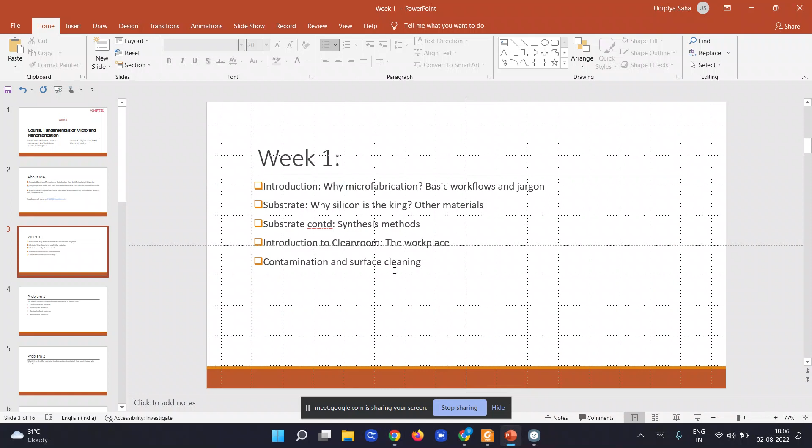Sure. Just wait. Now it's okay. The audio seems okay now. I shared my screen actually. Sorry. I hope you are able to see my screen. Yeah, now the screen is visible. No, sir. It's not visible. It is not visible? Now visible, now visible. Okay, sure.

So I was discussing what I am doing, and what I read from this slide. Week one is why microfabrication, and we discussed the basic workflows and the jargon. So I wanted to ask what is your motivation to take this course? How are you personally benefiting from this course, and how do you relate to it? Where will you be applying it? What would be the final goal you expect from this course? Can you all type it in the chat?

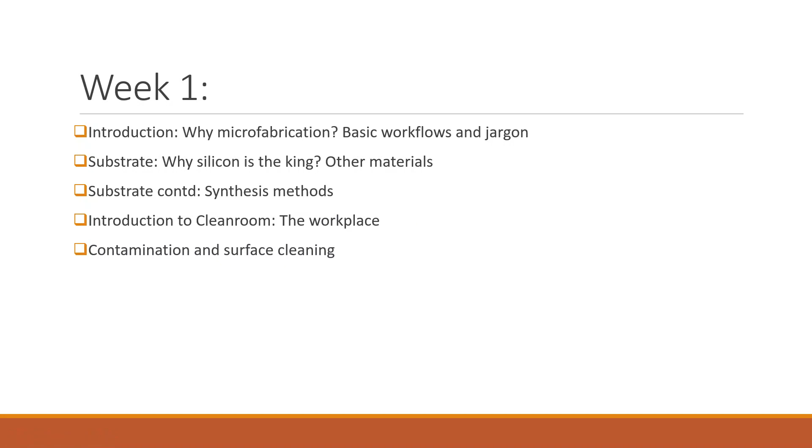The fourth video was on the workplace, the clean room, its intricacies, and the precautions we have to maintain. And the final video was on maintaining the workplace, and all the processing that goes behind surface cleaning. So, moving ahead, I would start with something simple, since I hope the crowd is interdisciplinary in nature. We know that we are working with semiconductors.

So problem one deals with the fundamentals of semiconductors, and it asks: the highest occupied energy level in a band diagram is referred to as? Can you all participate and tell what could be the answer to it? Anybody in the chat? You can raise your hand, or anything you are comfortable with. Okay, valence band. Which one? Minimum or maximum?

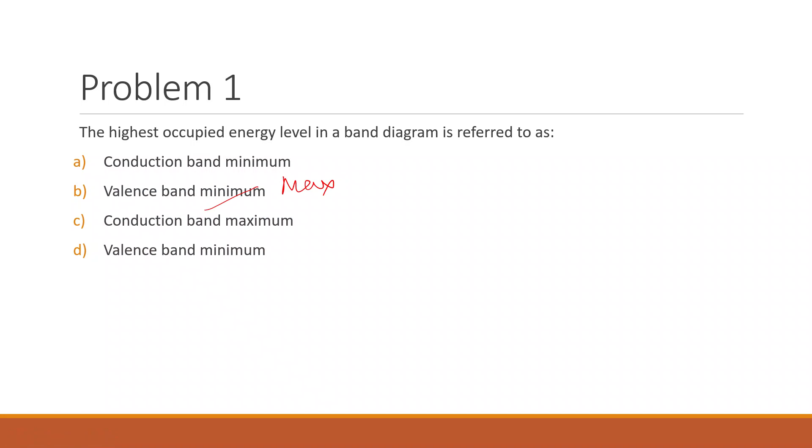So the second question is also pertaining to semiconductors only. We have heard a lot about Fermi level for conductors, insulators, and semiconductors. So the first question is, what is the Fermi level? What do you think?

In the lectures it might not have been mentioned properly, but a lot of times it has been mentioned, what about Fermi level? Anybody knows what the Fermi level is? Anybody can unmute and tell us, you're free to do so. Anybody?

Okay, the highest energy level that an electron can occupy. Perfect, to some extent, but you need to specify something - the highest energy level that an electron can attain at something - specifically, at absolute zero.

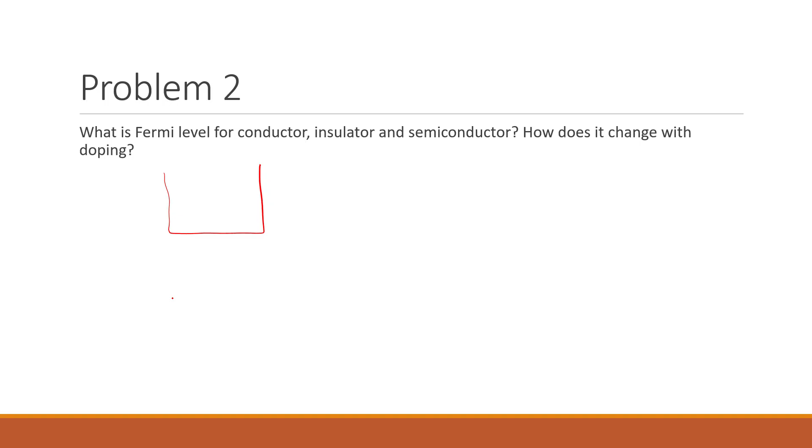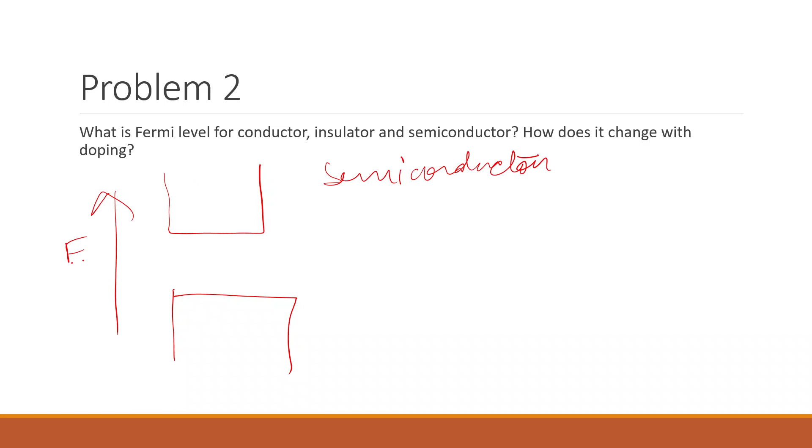So if I have, I hope you can see the structures - let's take conductor, insulator, and semiconductor. Let's talk about semiconductors first. If I consider this as energy, this would be the conduction band, and this is the valence band. The Fermi level for intrinsic semiconductors is usually in the middle of the two bands. This is what is called the Fermi level.

Similarly, for insulators and conductors, similar things happen. But with semiconductors, this is interesting because in the lectures we also delved upon doping - how does the Fermi level change with doping in semiconductors? We have two types of doping: N-type and P-type. With N-type, we basically have more charge carriers.

So what do you think - from the intrinsic part, this is the intrinsic, meaning no doping - should the Fermi level increase, meaning more than the intrinsic Fermi level, or should it be less than the intrinsic Fermi level? What's your take?

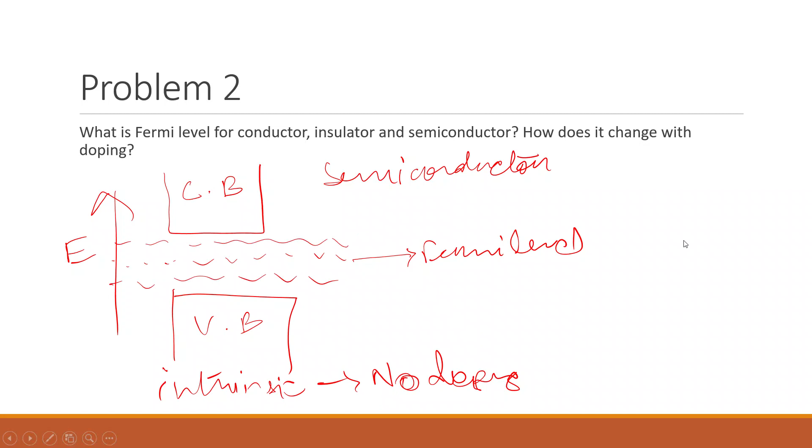Towards a perfect answer, perfect - so it would be like this, near the conduction band. And for P-type it would be reverse, it would be near the valence band. Perfect answer. So let's go to the next thing.

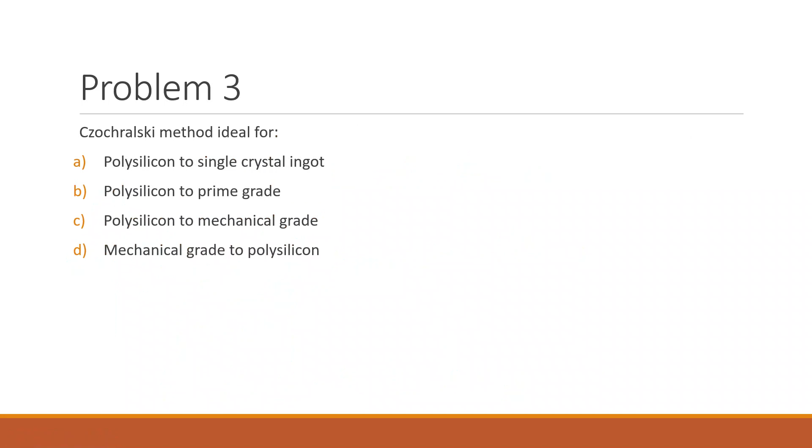So we have read about the Czochralski method, so it's a small question. Czochralski method, to summarize, has a seed which is lowered in a liquid and pulled out, and as it is pulled out, a single crystal is formed on the receding crystal, first on the seed and then on the following things that immobilize on that seed. This is the Czochralski method, and it is one of the most primarily used methods for silicon crystal formation.

So the thing is, first, what is the method used for? It's a straightforward question - Czochralski method is ideal for what? The first option is polysilicon to single crystal ingot. Polysilicon has a lot of crystals of silicon, converting to single crystal ingot. Polysilicon to prime grade - prime grade is what we use mostly for electronic applications. Polysilicon to mechanical grade is used for mechanical applications, and the fourth option is mechanical grade to polysilicon. Somebody has answered it as polysilicon to single crystal ingot - any more answers?

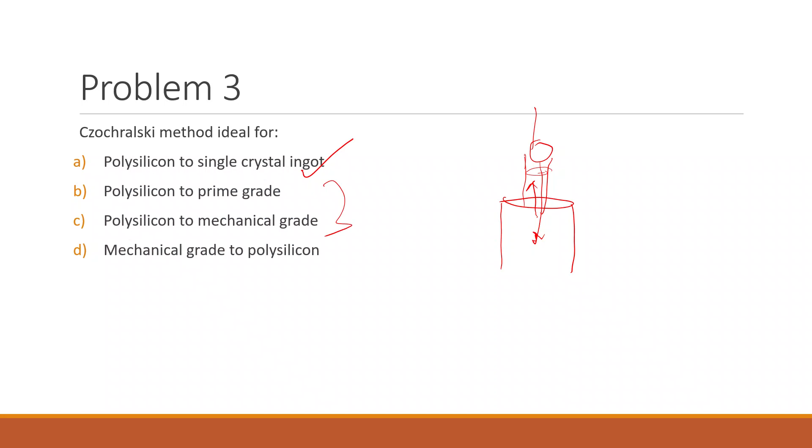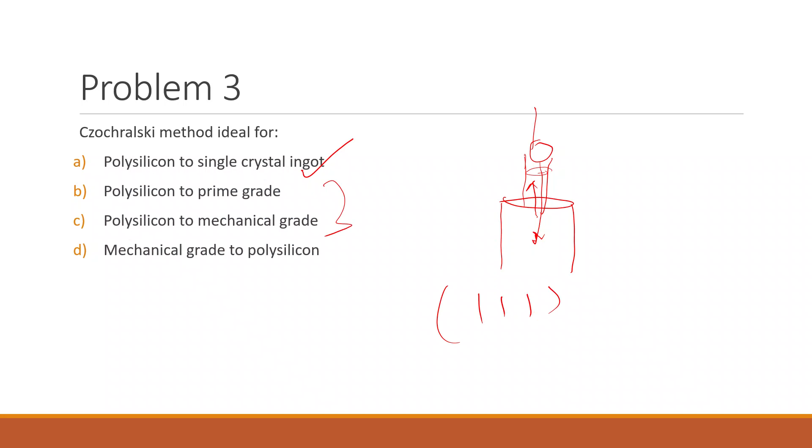Nice, you can get prime grade. So essentially it is a single crystal, meaning it will have the same plane, like a 1 1 1 plane throughout, but the quality can differ. It's essentially a single crystal, which is what is formed with the Czochralski method.

Following up, for this method, growth on which plane is more difficult? That is the question. And there's something that also derives its economy, like how cost effective that method is, and which is easier to build.

So what do you think - 100, 111, or 110? So which one is more primarily used, that I think would be most.

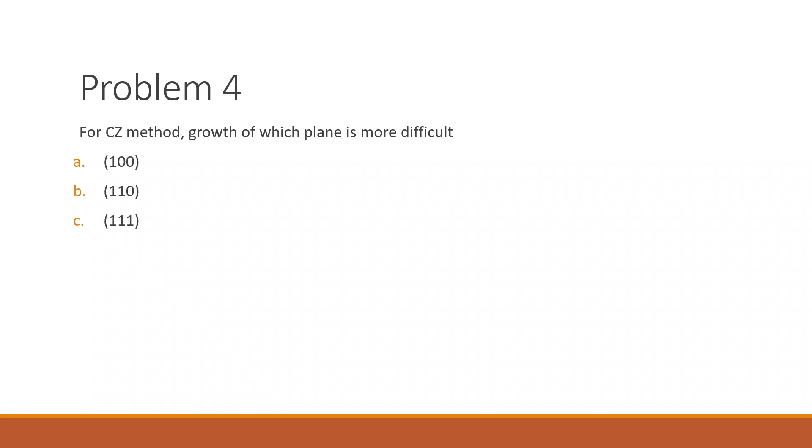Others can also participate. Nice. Okay, so everyone is saying 110.

So the easiest growth is done along the 111 direction, that we know. The examples, the primarily we will get a 111 plane, like silicon, and this is mostly dependent on the surface energy, which is a property of silicon. So 110 essentially will be more difficult and costlier than the other planes.

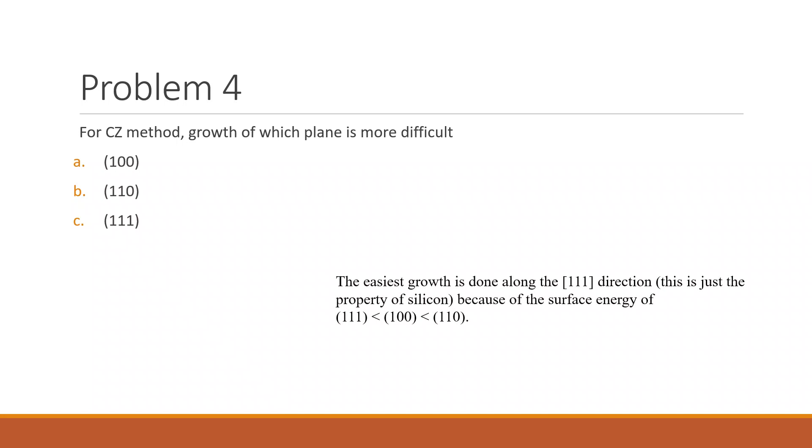Nice, you guys are good. So the thing is, in the Czochralski method, why are these single ingots circular, and what does this diameter depend on in the Czochralski method?

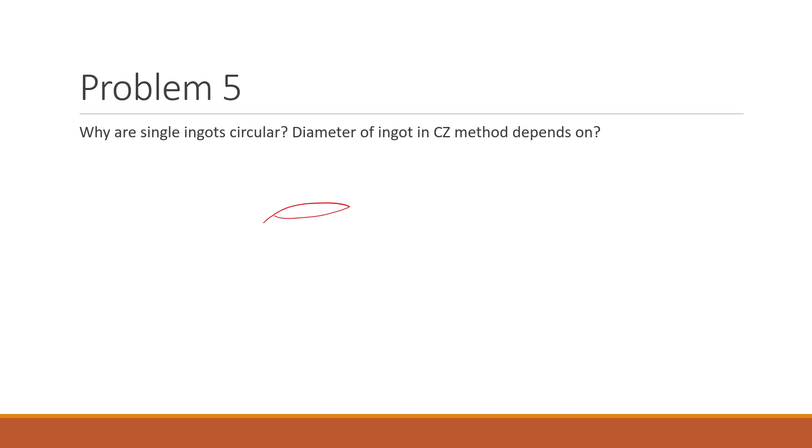So in the Czochralski method, we see that we usually pull it up from a polysilicon mixture. So what do you think - what measures whether it is round in shape or circular in shape? The first question is, why are they circular?

The rate of cooling can affect the diameter of the ingot, but why are they circular? That's the first question we are focusing on.

Nice, rotatory motion, yeah sure. So these have a rotatory motion also, and this rotatory motion also helps in maintaining the thermal management.

So now, what does the diameter of this ingot depend on? First, I think Bandhana has answered the rate of pulling. True - the area is inversely proportional to the rate of pulling. Nice.

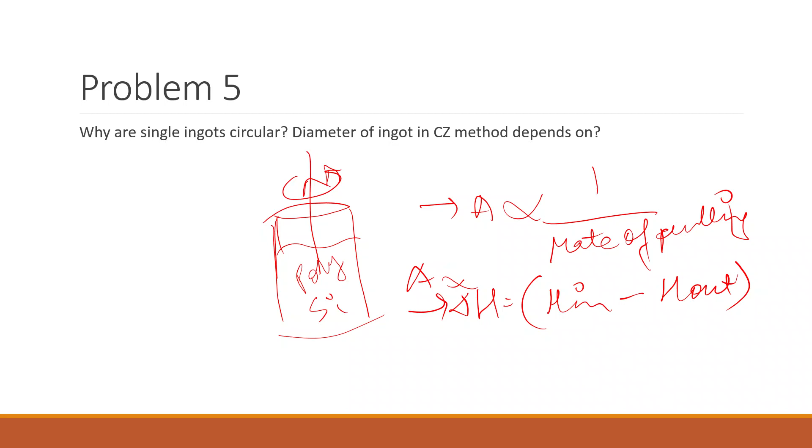Another factor? Correct - the latent heat, that is the difference delta H, H in minus H out, whatever - that also has an effect. This is directly proportional to the area of the single ingots that we get. True, heat difference. Perfect.

So all these methods are based on zone refining. This zone refining means that the impurities have different solubilities in solid and in liquid forms.

So in zone refining, here's the question: using the zone refining method, is the final solid purest, is the initial solid purest, or in this method is it equally pure throughout? Okay, initial solid is purest. Anybody have another answer, anything else?

Any answers, and other options are also possible, because essentially I made the questions after seeing the video. So any other factors can also be added, that's not an issue. You can give your own comments or arguments. You can actively discuss this. Yeah, Meenakshi.

So the initial solid is purest. Because in zone refining we are taking an initial seed for this process, and that crystal is taken to be the purest form, and then it attracts the purest molecules and atoms towards it to develop that rod.

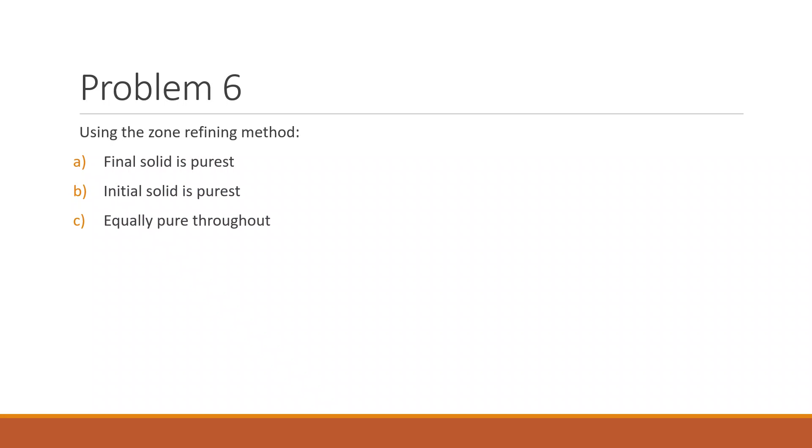So what Meenakshi is saying is, essentially, if I try - it is like we have a pot and it has a lot of polysilicon, and it can be impure also, so impurities and purities, everything is there. So essentially when you put our seed, the silicon has different solubilities in solid and liquid. So the melt, when it solidifies, very less impurities will be on the solid part, so it would be the purest.

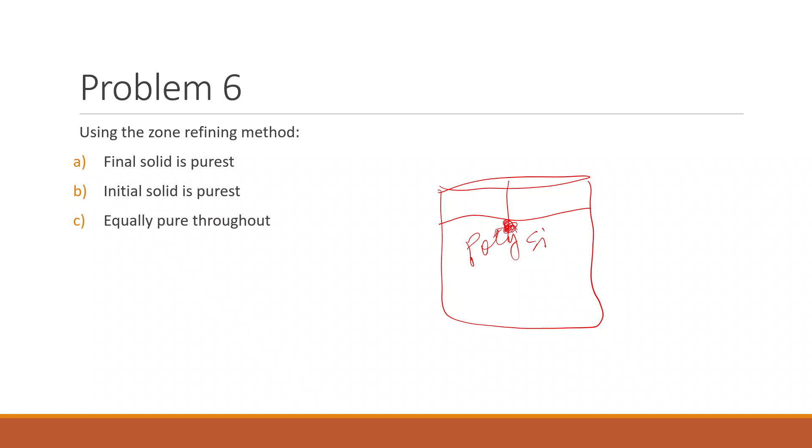But as we are pulling it out, the volume of this solution will decrease, and the impurities concentration will increase in comparison to the silicon concentration. So what happens is there is more chance of the impurities getting deposited on the silicon ingot that is formed. Everyone getting it? Am I able to explain it?

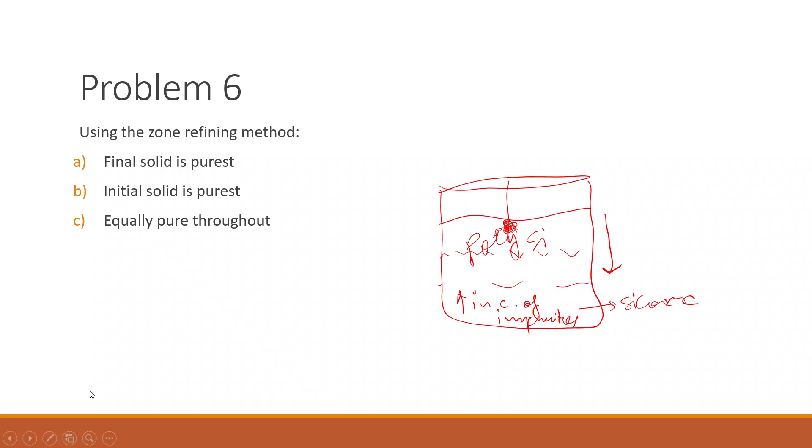Sure, sure, okay, very nice. Meenakshi, you have any thoughts? Okay, okay, nice, so we'll get to the next thing.

So after we have read, we also see that this Czochralski method is not ideal for gallium arsenide. So what would be an ideal method? First thing to ask is why gallium arsenide - where do we find gallium arsenide applications in day-to-day life? Do you see anything where we find gallium arsenide applications, and what would be its ideal use depending on its semiconductor properties? Anybody?

Do you all know anything about direct band gap and indirect band gap? Photodetector - yes, so you all know about direct and indirect band gap. So is gallium arsenide a direct band gap or an indirect band gap semiconductor? What do you think? Direct, okay.

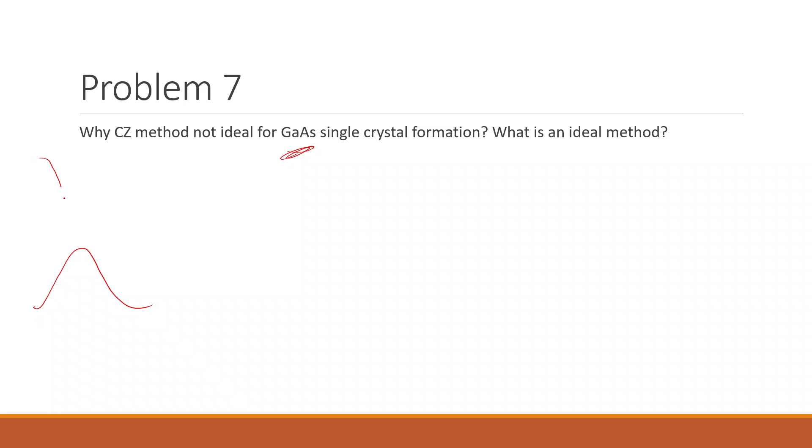So essentially it means that this is the conduction band, this is the valence band, and they are in the same plane. So what happens is that energy is not shifted, like in some materials it is shifted. So this is indirect, this is direct. These are very good for energy applications like light emitting devices or photodetectors. In indirect band gap materials, some energy is lost using other transportations like phonon transportations, which reduces the energy of the things.

So why is the Czochralski method not ideal for gallium arsenide single crystal formation? Anybody?

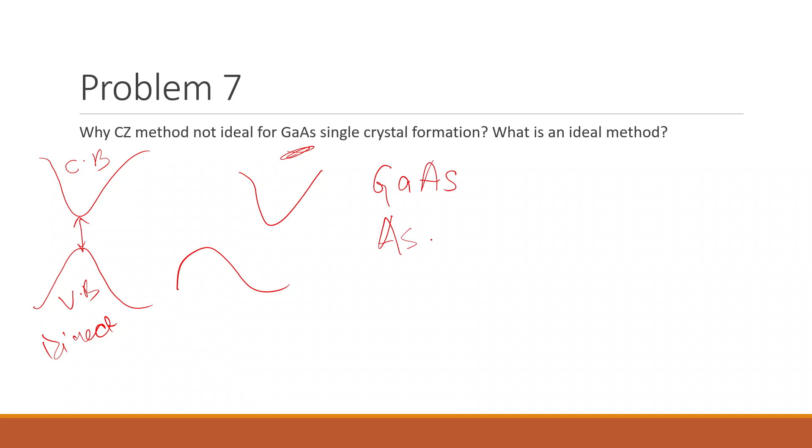So it's gallium arsenide - when we melt it, arsenic has a very low melting point. Arsenic evaporates, yeah, it starts evaporating, and this gives rise to structures that you would find, like the ingots forming like this. But they have come up with some solutions, like using boron, which can help in capping this arsenic release. But this boron capping also has some issues.

What do you think? So essentially, we have gallium arsenide, and we know that its arsenic has a low melting point and it evaporates when we do the Czochralski process. But we have a solution also - boron can be used to cap it and trap it in the system. But this boron thing also has a disadvantage - can anybody mention it? What is the challenge with boron capping?

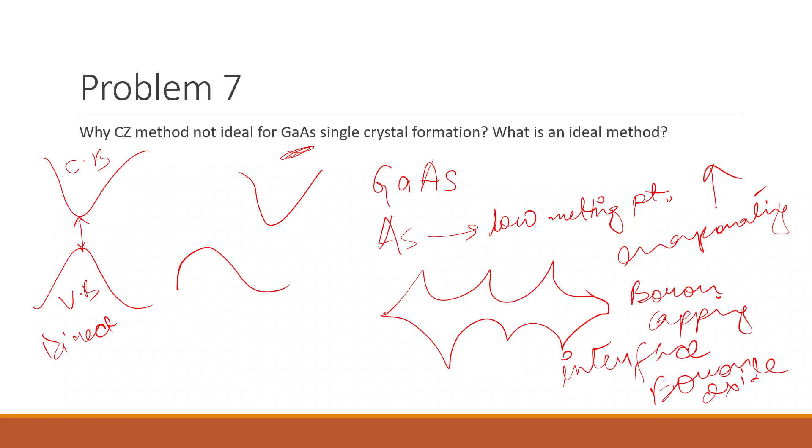So mostly these questions I have derived using the current assignments, looking at the videos, and mostly the past questions. So they are very relevant to the questions you would be getting in the current assignments.

Okay, somebody has answered crystal orientation. Anybody has any other answers? Anything adding to the list? Essentially, it can have multiple answers also, so you can specify that. Doping concentration. Okay. Any others want to try? It's completely fine to get it wrong.

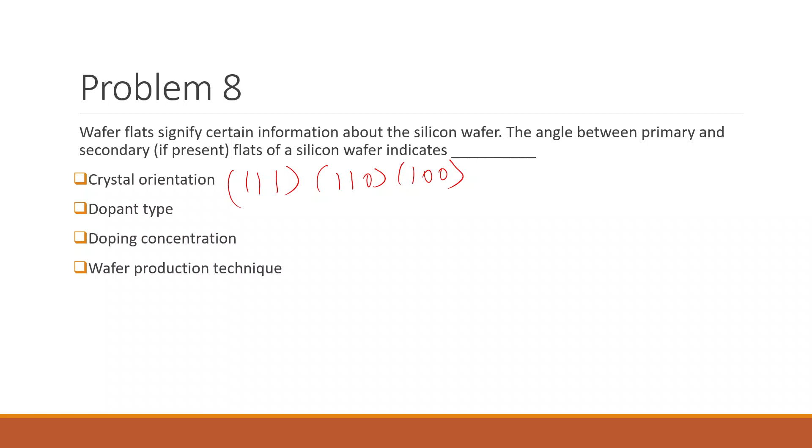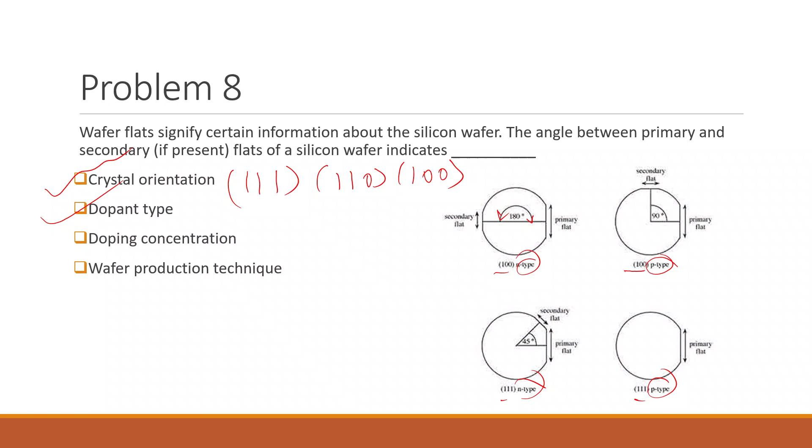And another piece of information we get is the type of doping. So we essentially get two pieces of information: one is the crystal orientation, the other is the dopant type. Doping concentration is something we can't see from this, and wafer production technique also. Such things I believe are available in the spec sheet of the wafers. But with only the wafer in front of you, you can only derive the crystal plane and the type of doping.

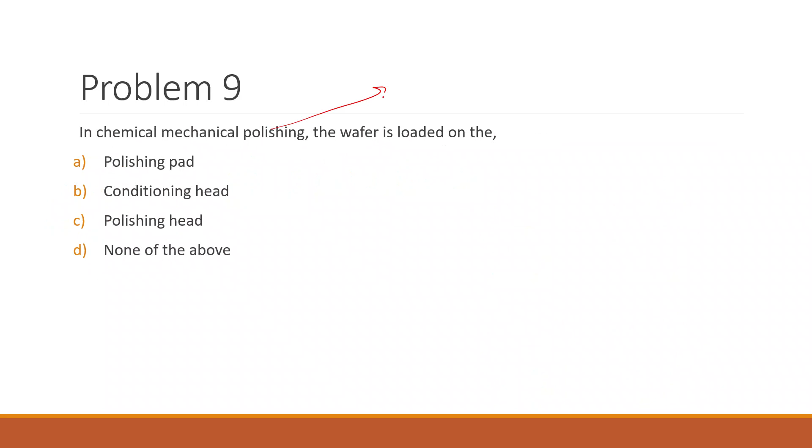Okay. So within wafer processing there is one important method, that is chemical mechanical polishing, polishing to a mirror finish. Can anybody quickly tell why polishing is important? Polishing, there are small pits and the surface is not smooth. Mm-hmm. Microscopic pits are there, so polishing is required to make the surface smoother.

Okay. What will happen if it's not smooth? And why mirror smooth? What will happen if it's not properly smooth? If it's not properly smooth, then there would be vacancies, because this fabrication is also at the atomic level, no? So we have to come to its crystal structure, and then there would be vacancies, and maybe some interstitial vacancies which would be filled.

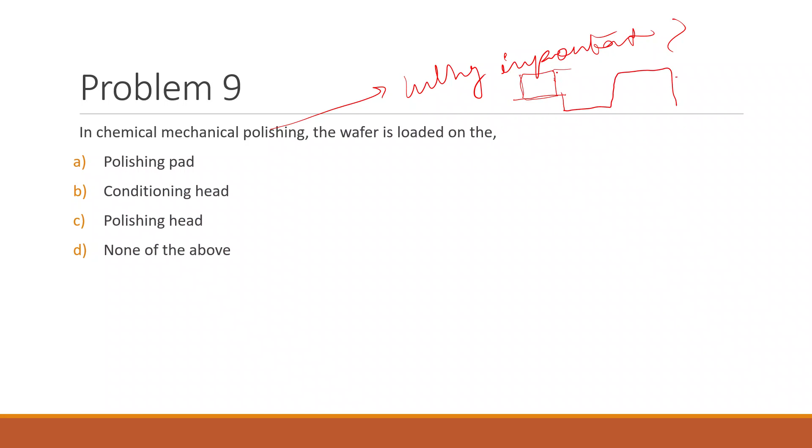True, true. So essentially, from the device fabrication point of view, if I have something irregular, and we usually deposit structures on it. If I made this structure with equal lengths, I would have thought it would spread like this, but for this gap, what you were calling a pit, my device would be like this. So this irregularity will have a repeatability problem.

We are essentially making thousands of these chips and scaling them up on a single wafer, so we want repeatability. With these gaps, the desirable structures may not be formed. So in chemical mechanical polishing, if you can recall, where do you place the wafer?

Before that, why chemical mechanical polishing? Okay, can anyone tell why it is chemical and mechanical polishing? What are the chemical and mechanical entities they have? During the polishing, what is the mechanical part and what is the chemical part that we are using to get the mirror finish? Can anyone tell?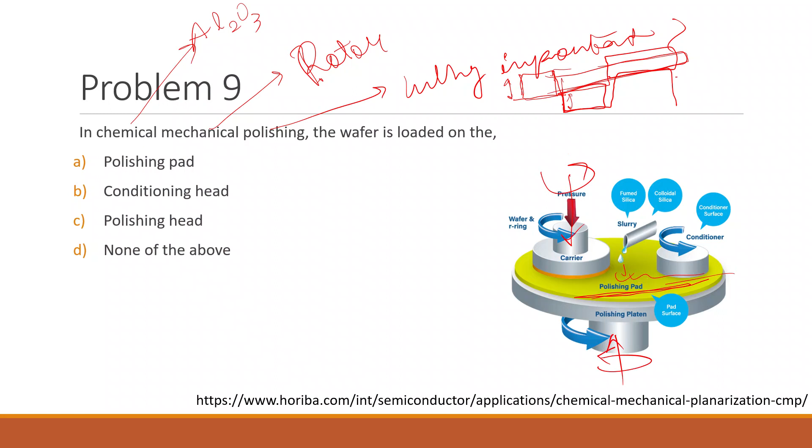So we usually have this polishing pad, and we place our silicon wafer on it, and we have this motor which has a rotatory motion, and it usually has a heavy weight and grinds through the surface. So you can see two motors are there. This is the rotatory part, and we usually drop some abrasives here. That, I think, is what gets to the chemical part.

So problem 10, we are discussing the clean room. As you understood from the week 1 videos, it is the workplace, and it is one of the important parts of microfabrication and nanofabrication techniques. So this is a very surface question: what is the advantage of performing a microfabrication process in a clean room environment? We know that clean rooms can be very costly, and maintaining them is very costly.

Can anybody tell how many levels we have in a clean room? That, I think, can tell why it is very costly. Does anyone recall how many levels there are in a top-notch clean room facility? I'm not talking about the classes, but essentially, what does a top class clean room look like, what are the different partitions it has. I think that would help us appreciate why it is so costly.

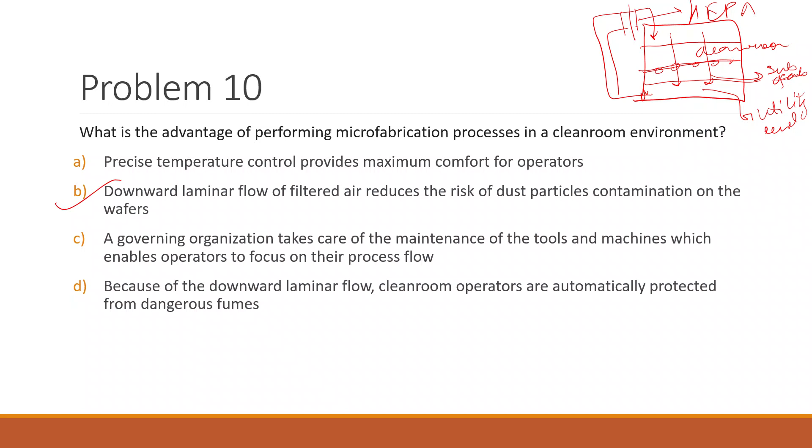So essentially, what would be the advantage of performing microfabrication in a clean room environment? Anybody answer? B. Downward flow of filtered air reduces the risk of dust particle contamination on the wafers. Okay. Any other answers? Okay. Essentially, this is the correct one, and this perforated flooring that I explained is what allows this flow of filtered air through the system.

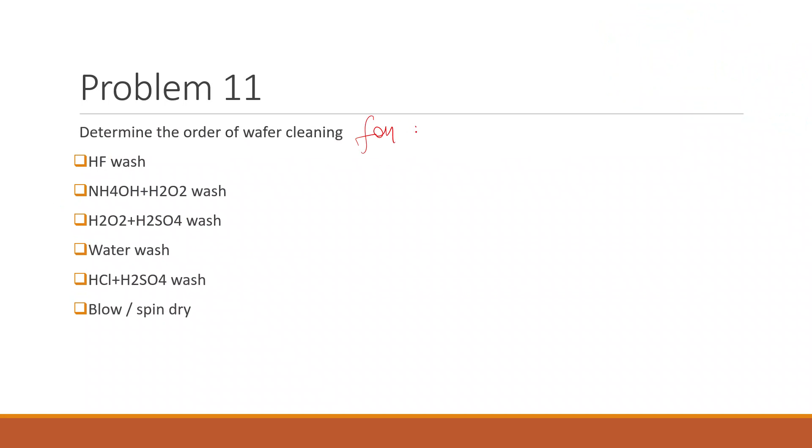So problem 11 is what we were discussing, wafer cleaning for use in fabrication. So these are the different steps we perform. So what do you think would be the order of the wafer cleaning?

In the last lecture you must have undergone the different cleaning procedures, the RCA cleaning, the Piranha cleaning, and all those. I haven't mentioned the names. I have only mentioned the constituents, and we can go ahead and, while discussing, figure out what they are.

So the first process. Anybody? The first process. Which one do you think would be the first process of wafer cleaning for using it for fabrication? Anybody? Yes, you would like to answer?

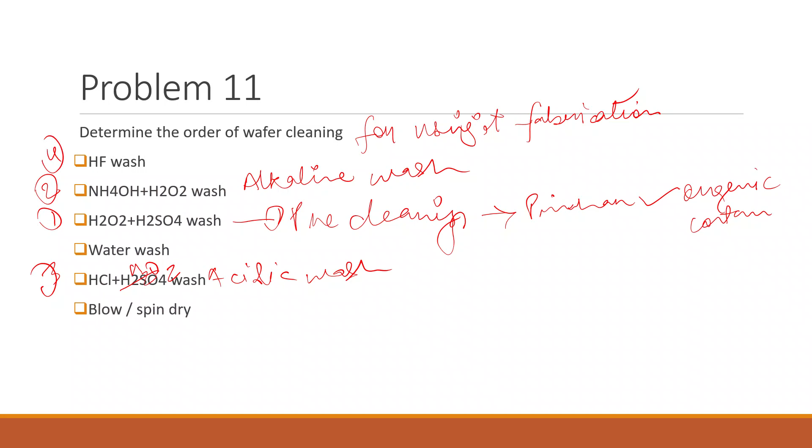Essentially, because we are using hydrogen peroxide in each step, it is usually for the SiO2 that would be formed on the surface, to etch it. Silicon oxide. Yeah, HF, I think you remember it.

And the penultimate one, the second last, would be water wash. Perfect, water wash. So this is one of the important parts, because if we forget the water wash, we are adding so much chemicals, so it is basically washing off all the chemicals. And the final step would be the blow dry, and we usually use nitrogen or spin.

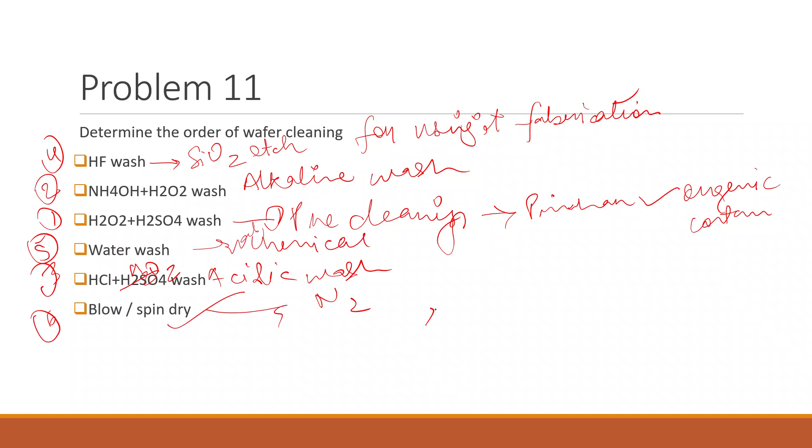And these checks are very important in quality check. These big firms have strict QC measures, quality check measures, and they are very strict with maintaining the quality of their devices. So such things are usually done in these industries, and any device that doesn't pass the QC, they usually reject it.